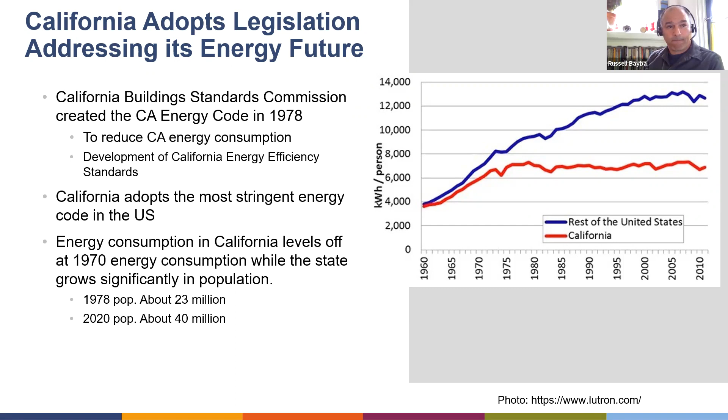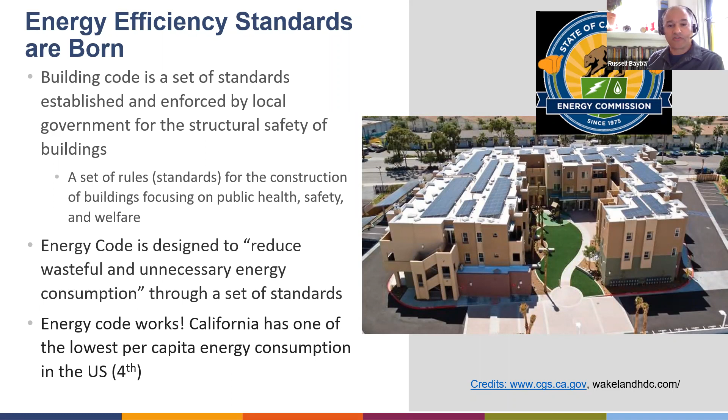And as I said before, this energy code works. We've kind of flattened the rise of energy in California. And there's a lot of different statistics out there, but California, being the largest state in the union, also has one of the lowest energy consumptions in the country as well.

Okay, and what's going on in California right now? So the energy code is moving slowly towards electrification. And as new houses are using a little less gas, they're using a lot more electricity. So this shift has already started to happen. Plug loads are one area where electricity use is rising a lot. We have a lot of electrical appliances. And natural gas is being less utilized. And in this case, in new construction, it is much cheaper to install a new heat pump than to retrofit an existing building with a heat pump water heater.

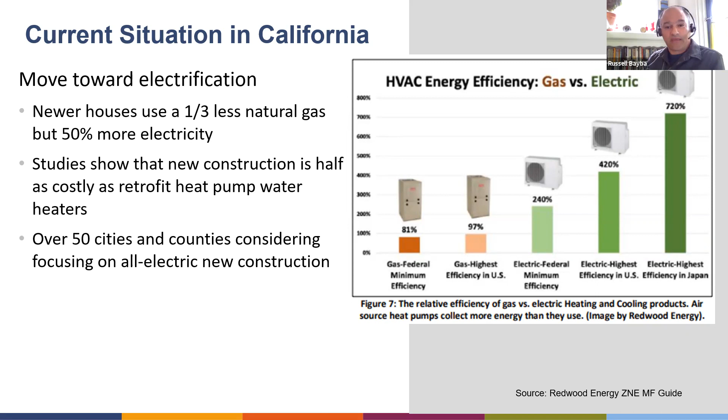And the other part of it is a lot of jurisdictions throughout the state are starting to move to an all-electric new construction stance. And this graphic on the right here really shows the efficiency drive from gas all the way up to very high efficiency heat pumps. And these, I guess, are in Japan. Okay, next slide.

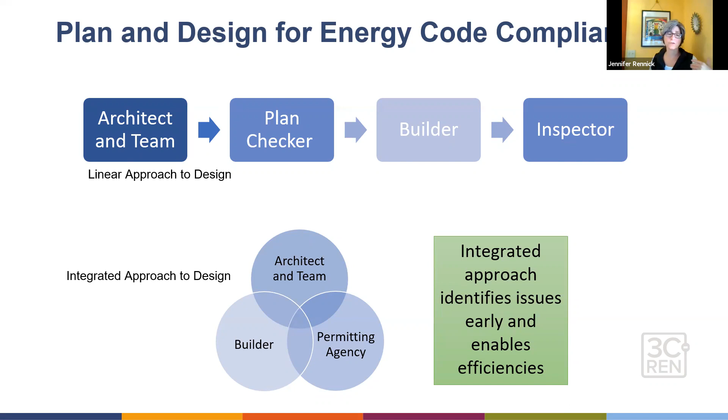We actually advocate for much more of a team approach, especially as our state moves towards a reduced energy footprint, more integrated these aspects of the energy use in the different parts of the code. We advocate for what's called an integrated design approach. We think that the builder and everybody on the team gets together with the permitting agency, or like a commissioning agent, or your HERS rater. We'll talk a little bit more about what that means. And everybody works together on it to produce a much better project with a lot less issues, a lot less change orders, and lower costs, really.

And so what does that look like? Well, the owner wants what the owner wants, and then they hire an architect, and usually the architect or the owner together pulls together their whole team of supporting engineers, energy consultants, et cetera. And at this point, it's up to the team to design a project that gives the owner what the owner wants, but also meets the whole of Title 24, which includes Part 6 and Part 11. And that is to include the plans and specifications.

And in case you haven't heard this before, when we all say we're going to produce our Title 24 report or Title 24 documents, we're actually talking most typically about Part 6, and sometimes about some of the documents that go to Part 11. And then we engage in the plan review and permitting process. Since the builder has already been on board with the project, they would have a really good handle on what is to be expected and what those energy measures are. And this is where he's going to get his subcontractors and the rest of the team involved for the construction.

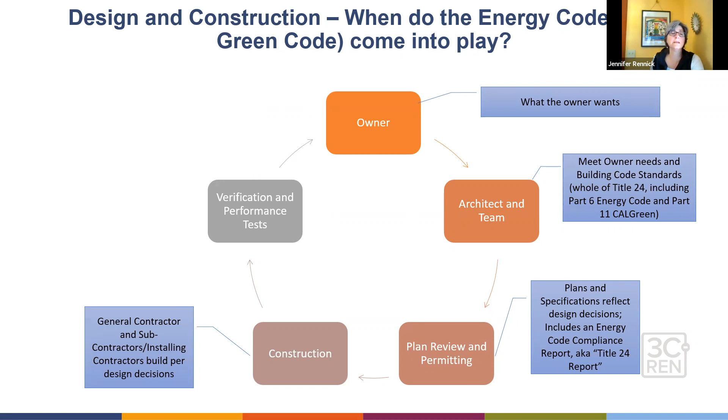And then we go through a process of verification and performance tests. How we know that is done properly is there's usually commissioning agents involved on large commercial projects, or there might just be what's called a HERS rater. HERS is Home Energy Rating System, so a person who is trained to do verification and performance testing on the equipment. And with that comes another set of reports, documents, and instruction manuals. All of that is to show that the whole design met Part 6 and Part 11 of the Energy Code, and it is delivered to the homeowner or building owner so they know their building was designed accordingly and they have those documents.

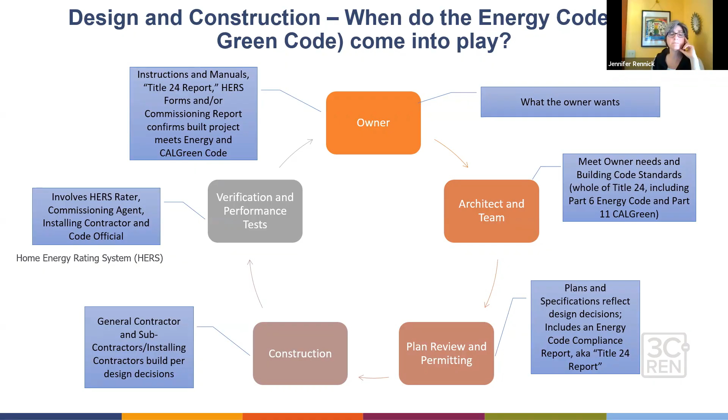Oh yeah, let me add one more thing. Basically this is all designed to integrate throughout the whole building. The energy code takes into consideration the foundation all the way up to the roof with all the parts integrated together. And this is all really to reduce energy consumption and make homes more comfortable for people to live in using less energy. Absolutely, that's right. So, real big picture, and we're going to get into it just a bit here on the energy code.

The idea is that we take a building and we look at every aspect of the building that uses energy. That's the heating system, cooling system, lighting system, hot water heating system, plug loads, you name it. Everything in your houses and the buildings you work in is connected to the electrical energy grid or gas infrastructure, and we're going to look at every aspect of it. The code does touch on every part of that building, and throughout the design, construction, build process, the energy code comes into play.

If you're not familiar with the whole code, it may seem overwhelming. I see Russ kind of smiling. Even if you've been involved with the code, it might seem a bit detailed, and it is. That's why there's actually a profession for energy consultants. But it's worth it. It's part of California meeting these really big picture goals to reduce greenhouse gas emissions and looking for a pollution-free environment for us to live in.

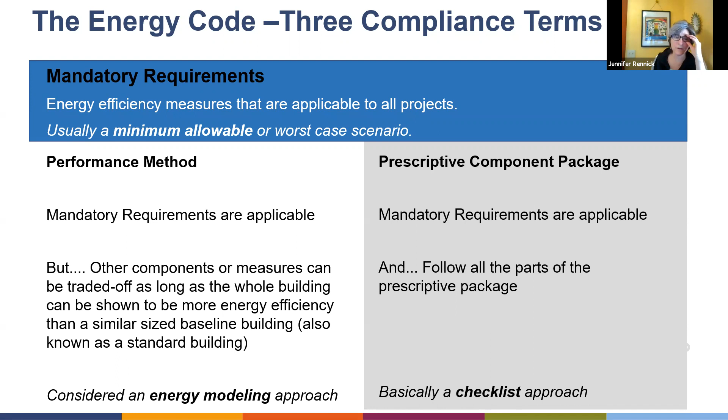You might have noticed that I said this varies per climate zone. So another key thing to understand about the energy code is that the California Energy Commission and all the research realized that California has quite a few microclimates. Our state is really unique in that sense. We've got coastal conditions, valley, inland conditions, mountainous conditions, and a huge difference between the southern and northern parts of our state in terms of weather patterns and climate. So California's divided that into 16 different climate zones.

One of the great tools that the California Energy Commission added is an interactive climate tool. Just as an example, I randomly chose a location in San Luis Obispo County and it popped up with climate zone 5. What I love about the tool is it's also satellite, so you can at the same time get the orientation of the property or the building and understand what climate zone it's going to be in.

The reason the orientation is so important is because our buildings will use varying amounts of energy depending on their relationship to the sun. Something on the south side of a house, for example, is going to heat up a lot more in the winter than something on the north side. And something facing due west in the warmer climates is going to cook and require a lot more air conditioning than something on the northeast or north part of the house in the same climate zone.

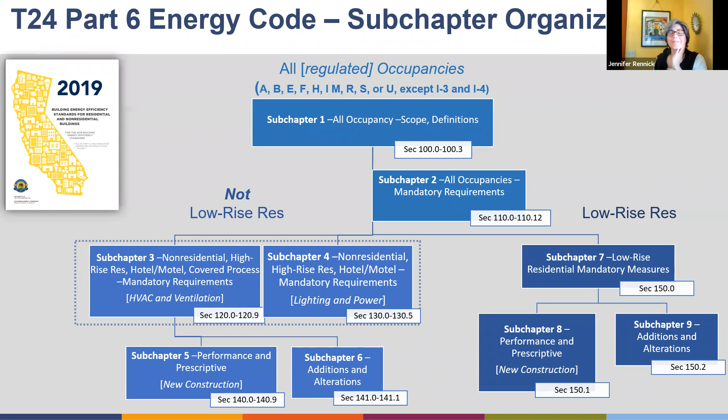So I put this organizational chart together for you guys in case it helps you understand the code when you go to look it up yourself. And Jennifer, just to remind everyone, everyone's going to get the slides. So this is really meant for you to reference. I would download this and put it on your desktop. You can pull it up if you're looking for something.

And here's a whole bunch of different places you can go if you're looking for something. We're hoping that you're going to use this later. You don't have to memorize everything right now, but hopefully you can use this as a resource in the future. Yeah, exactly. I wish someone had explained to me how it was all organized a bunch of years ago. I would have loved that.

One brilliant thing someone did figure out to do is in subchapter 1, go find table 100.0-A. This matrix in the code, I think, is super useful to help navigate your way into the code sections. It's kind of set up by the applications. So I'm going to run through an example of how you might take a look at something in a residential project prescriptively. So for example, we've got low-rise residential.

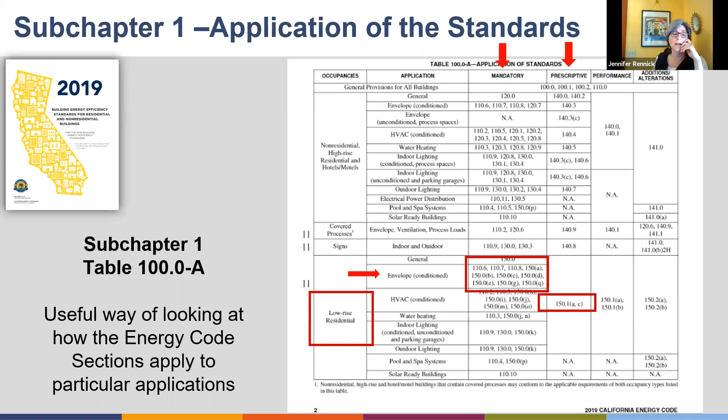So now you can save yourself some time. Instead of going through the table of contents trying to figure it out, this little chart is great. So we're going to go straight into those sections and give you an idea of what that looks like. This isn't exactly what the code looks like; this is my interpretation of how it's organized for a low-rise prescriptive example. The standards themselves are going to be in the standard code book, and a lot of the translation of what these mean is going to be in those reference appendices.

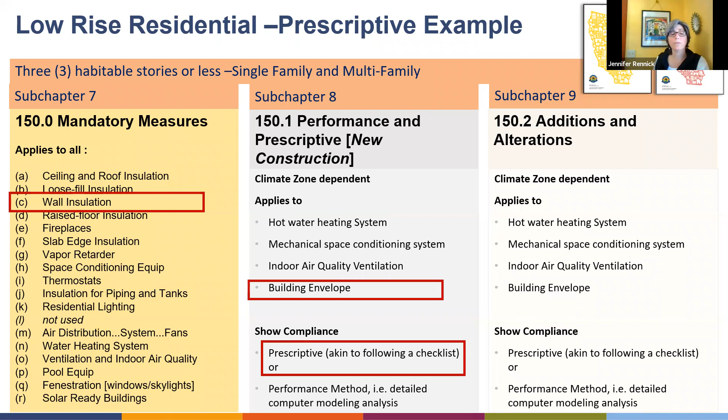So one of the sections that we highlighted in the chart was section 150.0C, and that deals with the wall insulation. And the other category that was highlighted was section 150.1, and we're going to look at the building envelope and take a look at a prescriptive example. Now, this is what you would see in the code when you get to the component package in that section.

So let's say we have a new home in Paso Robles, and we figured out it was climate zone 4 from that interactive map. We could come to table 150.1A, component package for single family projects, and we're going to just look at the walls right now, because you're going to have to do this for everything: the walls, the windows, the mechanical heating and cooling. But right now we'll use the walls as an example. You would enter the chart at climate zone 4.

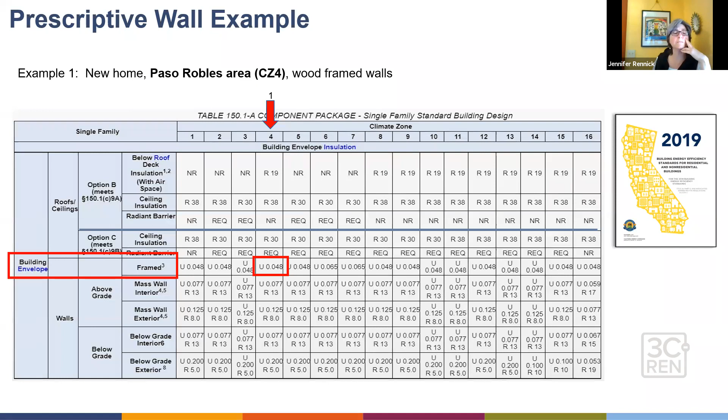So everything in that column potentially is applicable, and we're going to enter the chart for building envelope, framed walls, and it tells us we have to comply with a U 0.048. Well, when I was first starting out with the energy code, I used to look at that and think, oh my God. Just above it, if you were to look at what you could do for a roof or a ceiling, they would tell you you need an R30 or an R19. So they're actually telling you what level of insulation you need.

And if you don't know what R19 or R30 is, when you look up insulation to buy it, like at Home Depot or a big box store, there'll be a label on it telling you what R level it is. It's an indication of how well the insulation is going to work, and there's a certain thickness and depth to it. So now with the other part of the code for the walls, though, it gives you U factors.

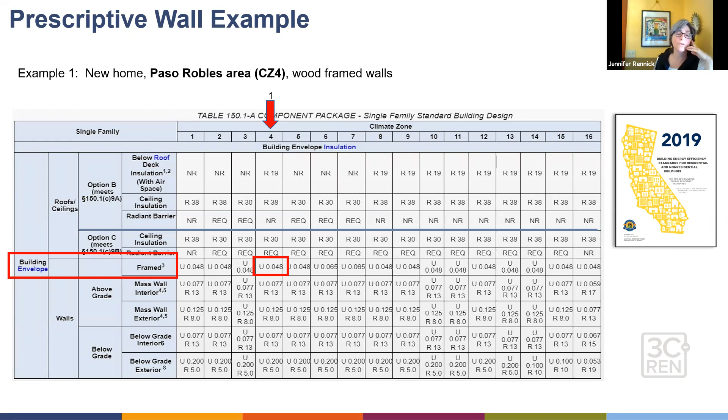Oh, okay, so this is where you're going to crack open your manual. You've got your standards, you've got your reference appendices, but now we're going to crack open the residential compliance manual, because in there they've got some great resources that help translate what that means. What does meeting a U factor of 0.048 mean? And you might have noticed the other climate zone said 0.065.

So there's a great table in there, a number of them, but you can go in on the U-factor section and scan now for a U-factor, or it's sometimes called a U-value, of 0.048, and they're down at the bottom. So all three of those and any combination similar to that would be a prescriptively code-compliant wall for climate zone 4. So you don't have to do an energy model if you follow the whole recipe card.

And what it says is, okay, you need a 2x6 wall that's at least 16 inches on center, and you're going to fill that cavity insulation with an R19 or higher. So it could be the R21 or the R23, could be like a dense-packed cellulose. And you're going to have to add some exterior continuous insulation, like an R5.

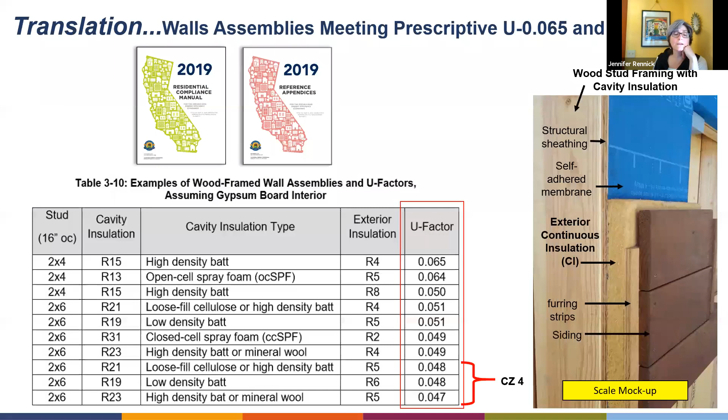Now, I'll give you an example of how the energy code comes into play on a non-residential project. And I think it's important to see that some of the requirements are different, but also you're just going to now open a different set of manuals. You'll still have the standards and the reference appendices, but now you're going to want to use your non-residential manual.

And this is an actual project that we worked on, and it was a 2-story non-residential building in the Santa Maria area. And the architectural team was considering metal walls. And so, yeah, there's that non-res manual. They were considering metal stud walls. And that would imply that they would need a 2x6 wall, at least 24 inches on center with an R19, but an R10 continuous insulation. So a few inches of exterior rigid.

The builder didn't want to deal with the exterior rigid insulation, so they were also considering, well, what if we went to wood stud walls? Well, yeah, then in climate zone 5 in this location, with wood stud walls, you would meet prescriptive with just a 2x4 wall filled with R13 insulation. That seemed easier to build, right? So the whole design team looked at that as the potential.

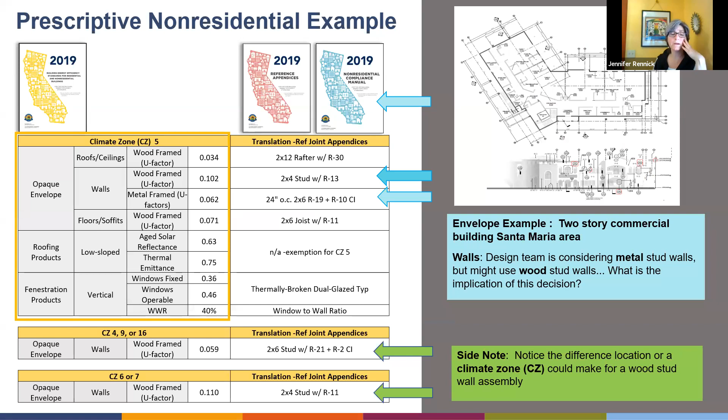Because really where this goes from here is a lot of times we're asked to do a performance energy model to mitigate against something, like maybe not do as much insulation on the walls, or maybe use a different lighting system or do a different mechanical system.

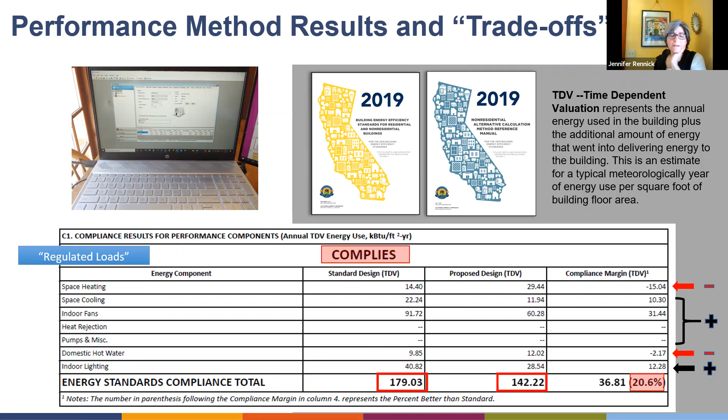I think part of what we're trying to do, well, let me rephrase that. What we are working on with this for everybody is to hit maybe the main bigger pictures of the energy code. We hope that this works for people and that we can go deeper into the code with upcoming series and other presentations.

But a lot of what we want to do is leave you with a basic understanding of where the code Title 24 fits within the bigger picture of all the code requirements of California, what websites to go to get a hold of those documents, where to go to get support for understanding those documents, and where you can find additional resources so that you can dig deeper into all these things, including getting some real specific questions about your own projects answered.